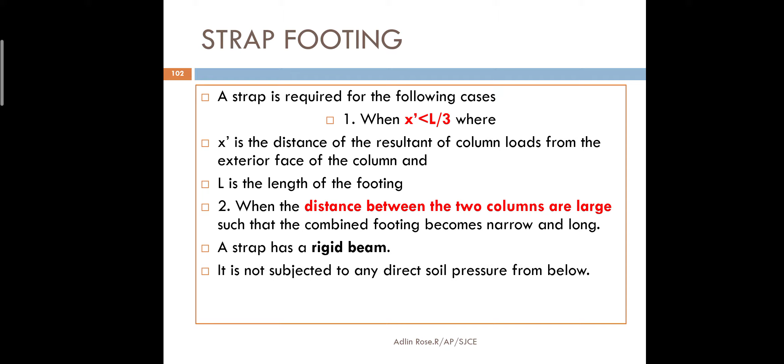We also saw if the distance between two columns is large, they are connected by a strap beam or a strap footing. We know that they will not carry or transfer any load to the soil, but only transfer the moment from the exterior to the interior footing.

There are a few assumptions involved in the strap footing, which we saw in the last class. The assumptions are: we assume the soil contact pressure is going to be uniform below the footings, and the strap footing is a rigid beam. It is considered to be weightless.

One thing I've been telling from the procedure is that there is an exterior footing and an interior footing. Usually the left side footing is the exterior footing and the right side footing is the interior footing.

In strap footing, the interior footing is assumed to have a centrally loaded footing. It's a centrally loaded footing, which means there is no eccentricity. Since the interior footing is centrally loaded and there is no eccentricity, it is going to be a square footing.

Whereas for the exterior footing, the load is not going to act at the center of the footing. There will be some eccentricity between the load and the center of the exterior footing. Due to this eccentricity, we are going to proportion the exterior footing as a rectangular footing.

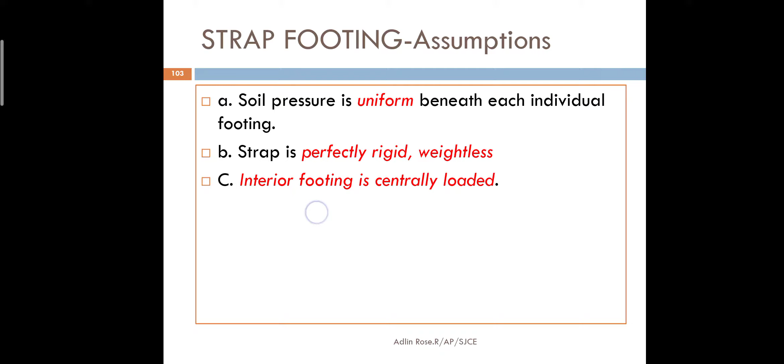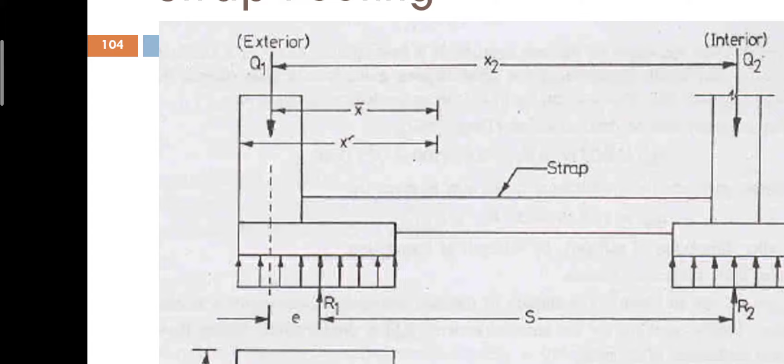So this is what I've been telling: the exterior footing has eccentric loads. There will be eccentricity E between the load Q1 and the reaction or resistance of the soil R1. Then for the interior footing, load Q2 and R2 - since the load is centrally loaded, the reaction will also exactly act at that point.

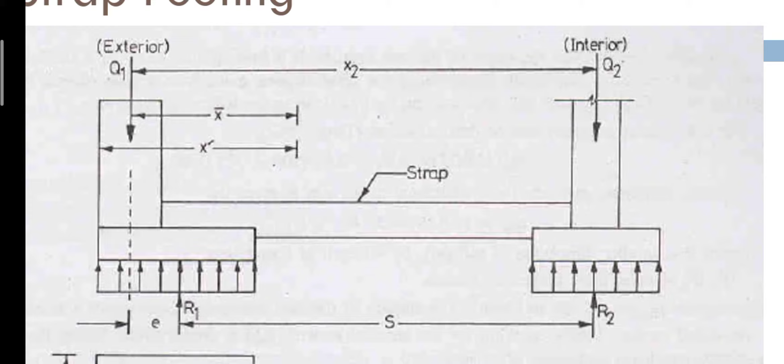The distance between the center to center spacing of the columns is represented by the notation x2, and x bar is nothing but the centroidal distance of the strap to the Q1 load, and x dash is the exterior of the footing to the centroidal point of the strap.

The eccentricity is between the load and the reaction, because exactly at the center reaction will occur, but the load is acting somewhat distance from the center of the footing. So that gap produced is taken as eccentricity E.

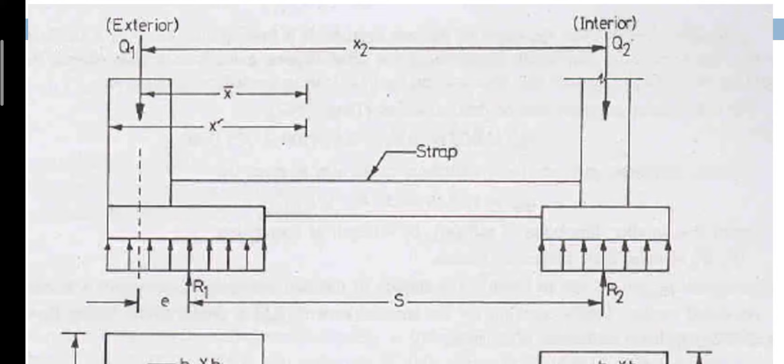From the picture I can tell x2 minus E gives you the remaining distance S. S is nothing but the distance between R1 and R2. So from the picture itself I can tell E plus S is equal to x2. These notations have to be remembered.

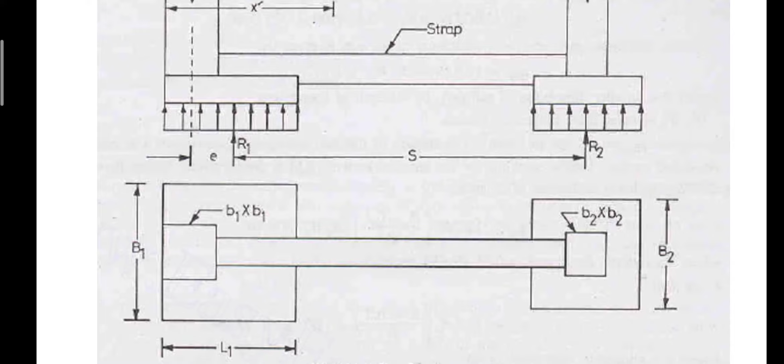Looking at the plan top view, the outer footing is going to be a rectangle, and the size is capital B1 by L1. Size of the interior footing is a square footing, so only one side is enough, that is B2.

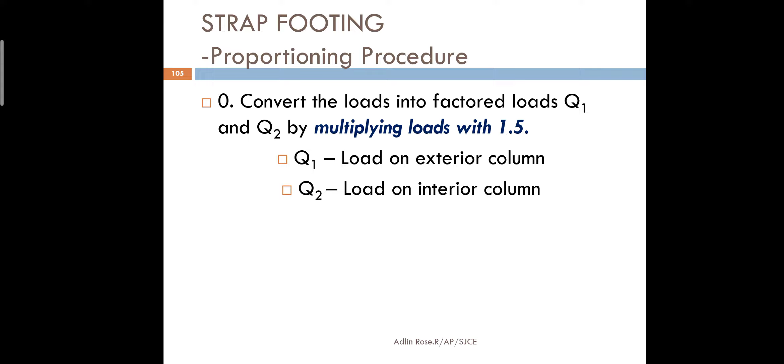Unlike the other two proportioning procedures we saw, first we multiply the loads by 1.5 and convert them into factored loads. Then we will assume an eccentricity. Usually an eccentricity of 0.7 is assumed.

After assuming eccentricity, the length of the exterior footing L1 is found. L1 is equal to 2 into E plus 0.5 into B1, where there is no projection consideration. So note this formula: first factored loads, second step assume an eccentricity of 0.7 meter, then length L1 equals 2 into E plus 0.5 into B1, where B1 is the width of the column, size of the column is b1, and E is eccentricity.

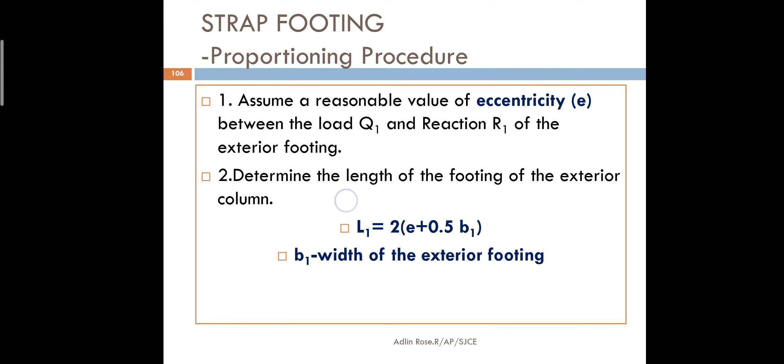The next step is finding the reaction R1. Note down this formula: R1 is equal to Q1 X2 by S.

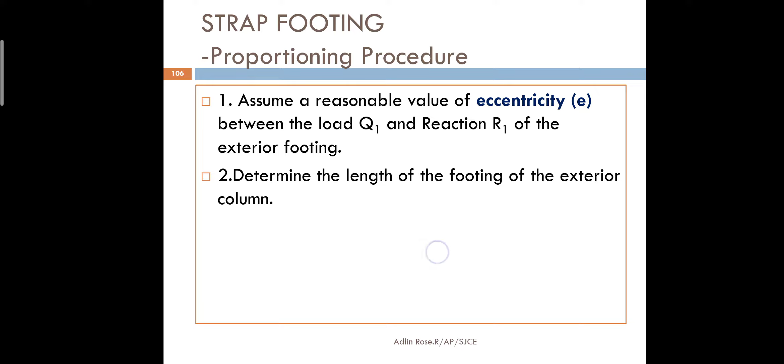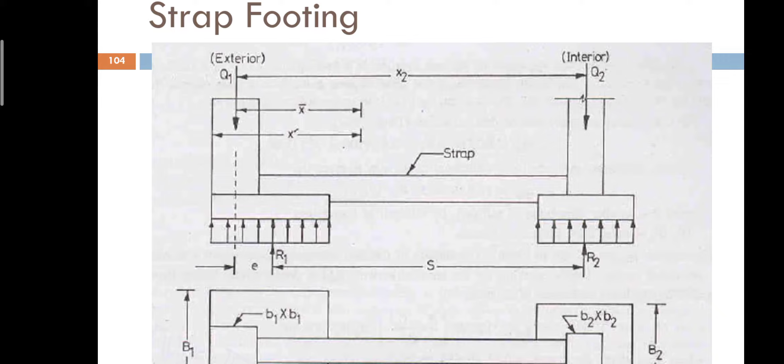How do you get this formula? In the picture, if you take moment about the point where R2 acts, what will you get? Q1 into X2 minus R1 into S is equal to 0. Taking moment at the point where R2 is acting gives R1 into S minus Q1 into X2. So from this we can find R1.

R1 is equal to Q1 into X2 by S, where Q1 is the load acting at the exterior column, and X2 is the center to center spacing of the columns.

And what is capital S? It is the distance between the points R1 and R2.

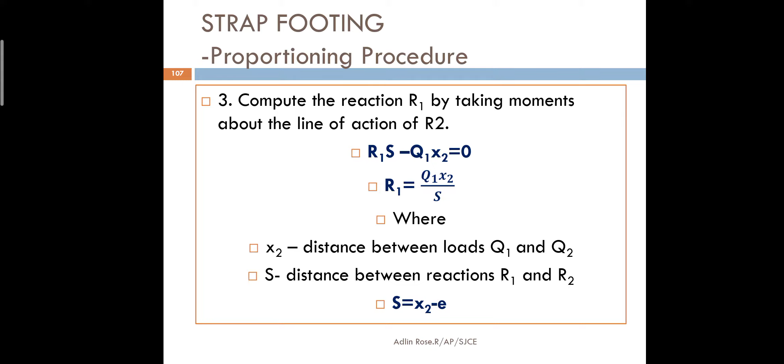And what is S? We can find it from X2 equal to E plus S. So S is equal to X2 minus E. Note down the R1 formula and the S formula: S equals X2 minus E. Then the fourth step.

How will you find the fourth step? After finding one reaction, how will you find the second reaction? By using the equilibrium equation.

Downward forces is equal to upward forces. So downward forces are the loads Q1 plus Q2, and the opposing forces are the reactions R1 plus R2.

Substituting the R1 value found in step 3, we get Q1 into X2 by S plus R2 is equal to Q1 plus Q2. Taking Q1 terms on one side, and R2 and Q2 on the other side, Q1 is taken common on the left hand side, and the LCM is taken: X2 minus S by S equals Q2 minus R2, and we know that X2 minus S is E. So Q1 into E by S is equal to Q2 minus R2. So R2 is equal to Q2 minus Q1 into E by S.

For solving problems, you just have to remember the R2 formula. So note down the R2 formula: Reaction R2 is equal to Q2 minus Q1 into E by S.

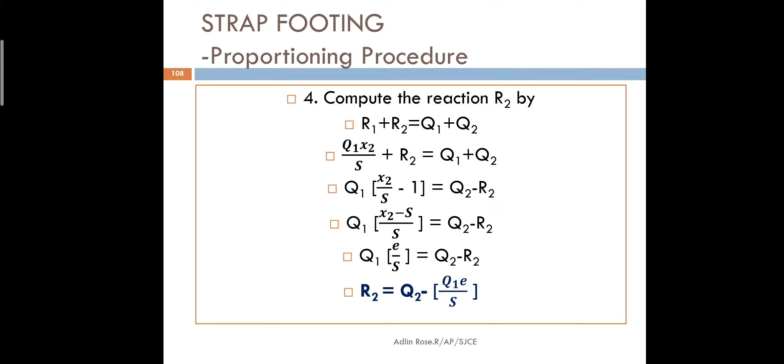Q2 is the load acting on the interior footing. Q1 is the load acting on the exterior footing. E is the eccentricity, and S is the distance between R1 and R2.

Then find the areas. What area did we use there? Load by allowable pressure, load by stress, we used in the trapezoidal combined footing and rectangular combined footing. But in this case we will use the areas differently.

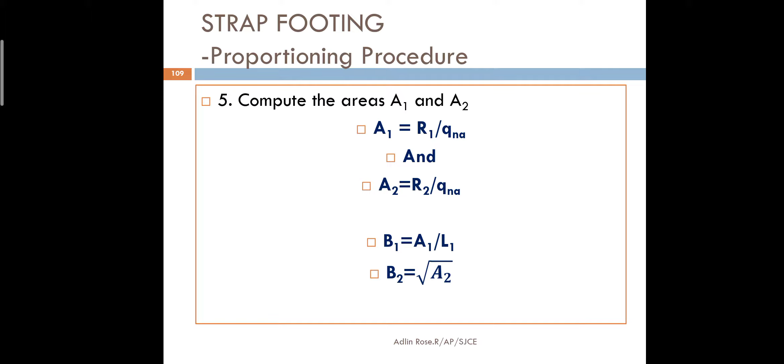A1 is equal to R1 by QNA, and A2 is equal to R2 by QNA. Here we use the reaction instead of load Q1 - you should remember that, you should not get confused. When we find the area here, we will not use the load, we will use the reaction by pressure. So A1 equals R1 by QNA, and A2 is R2 by QNA.

Then find the widths of the strap. I said B1, that is the exterior footing, is going to be a rectangular footing, so B1 is equal to A1 by L1. Whereas the interior footing is going to be a square footing, so B2 is going to be square root of A2.

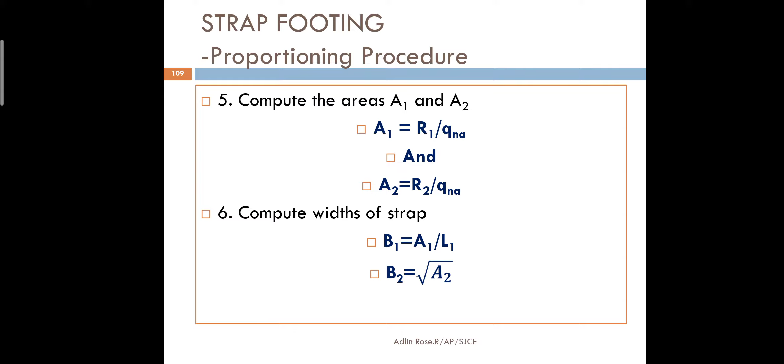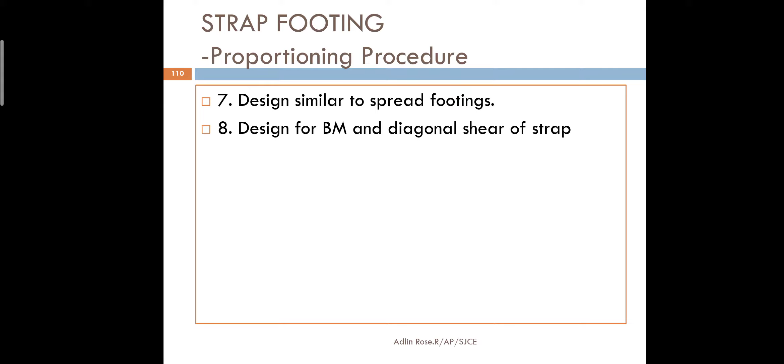Remember that. After finding these, then find the bending moment, find the shear force, draw the bending moment diagram, draw the shear force diagram, then find the reinforcement detailing. That is about the proportioning procedure.

Now we will move to the problems.

It is decided to provide a strap footing for two columns A and B as detailed below. Column loads: load at A is equal to 1500 kN and load on B is equal to 1450 kN. Size of the column is 0.5 meter. Center to center spacing of the columns is 5.8 meter. Allowable soil pressure is equal to 370 kilonewton per meter square.

So first we'll write the given data. It is asked to proportion a strap footing. Second, column size is given, so column size B1 is equal to 0.5 meter. Then load on the exterior column A, that is 1500 kilonewton. Load on the interior column B is equal to 1450 kilonewton. Center to center spacing of the columns, represented by X2, is equal to 5.8 meter. Allowable bearing capacity or allowable soil pressure QNA is equal to 370 kilonewton per meter square.

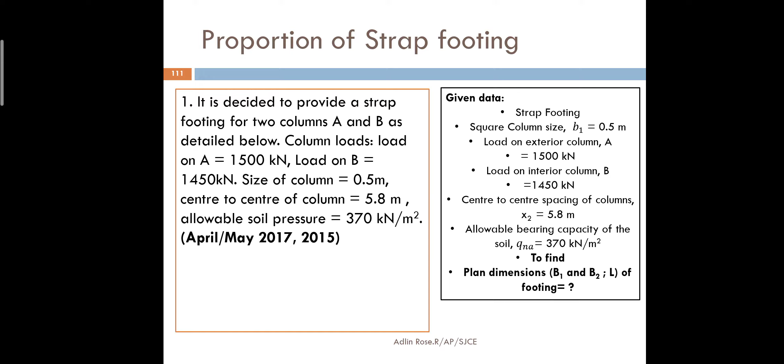Now, what is to be found are the plan dimensions. They have asked to find the plan dimensions. Now we'll go by the steps.

First we should multiply the given loads by 1.5. So multiply load A by 1.5: 1.5 into 1500 equal to 2250 kilonewton. Then load at the interior column Q2 is equal to 1.5 times B: multiply 1.5 by load acting at the interior column, 1450, equal to 2175 kilonewton. So first we will multiply the given loads by 1.5.

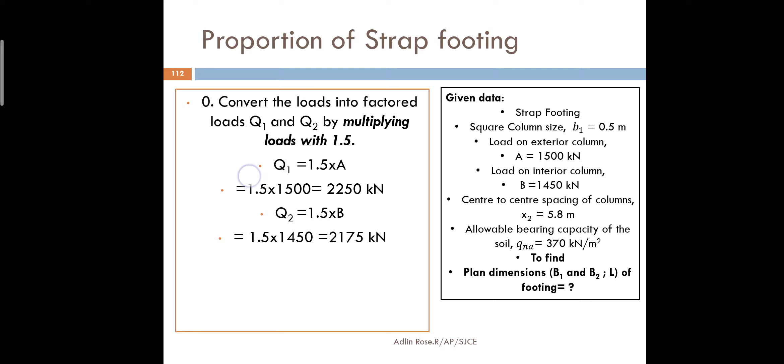What is the second step in strap footing? We assume an eccentricity. I told you to assume an eccentricity of 0.7. Reasonable eccentricity, assume it to be 0.7. In almost all cases you assume it to be 0.7.

How will you find the length? We know the length formula: L1 is equal to 2 into E plus B1 by 2, or L equals 2 into E plus 0.5 B1. So 2 into E, assumed to be 0.7, plus 0.5 into B1 - in the question the size of the column is given as 0.5.

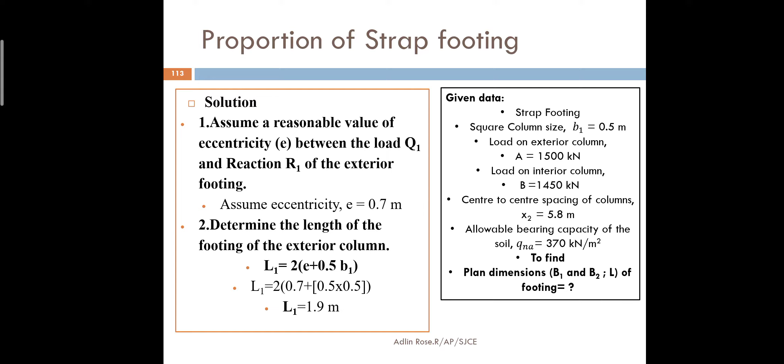So you'll get L1 equal to 1.9 meter. After finding L1, what is to be found next? The next step, we have to find R1, R2.

To find R1, R2, first we should find R1. What is the R1 formula? Q1 into X2 by S. And we have an S formula. What's the formula for S? X2 minus E.

X2 is nothing but center to center spacing 5.8 meter minus we assumed an eccentricity 0.7, that will give you 5.1 meter. Substitute in R1. Q1 is 2250 into 5.8 center to center spacing divided by S 5.1, that will give you 2558 kilonewton.

After finding reaction R1, we can find reaction R2. R2 is equal to... again the same is repeating. Now you have to find R2. How will you find R2? We have a formula: R2 is equal to Q2 minus Q1E by S.

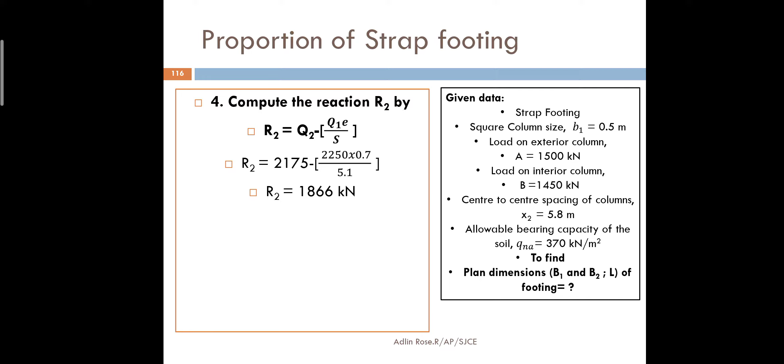So what is Q2? 2175, found in the first step. Minus Q1 is also 2250, which we found out earlier. Into eccentricity we assume to be 0.7, divided by S which is 5.1. That will give you 1866 kilonewton. Next step is finding the area.

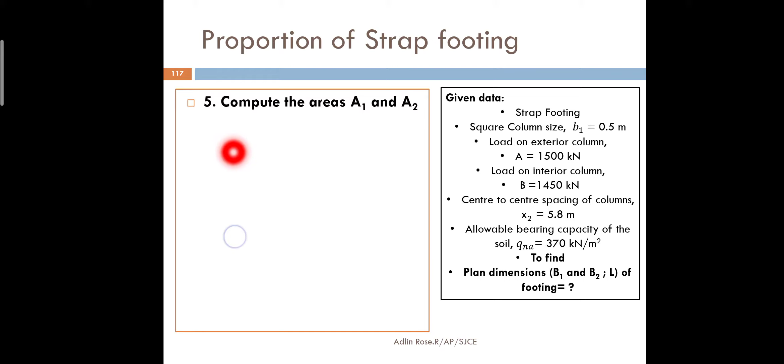How to find the area? A1, A2. As I said, area is equal to... we know that stress is equal to load by area, so area is equal to load by stress. Here instead of using load we should use reaction.

That you should keep in mind. In strap footing we use reaction. So area A1 is equal to reaction R1 by the pressure or the stress given, which is QNA. That is R1 equal to 2558, which we just found, divided by QNA which is 370 given in the question.

That will give you 6.9 meter square. Similarly, A2 is equal to R2 divided by QNA. So R2 is 1866 divided by 370. That will give you...

5.04 meter square. Now after finding A1, A2 we should find B1, B2. So B1, what is B1? B1 is rectangular footing, so A1 divided by L1 gives me B1.

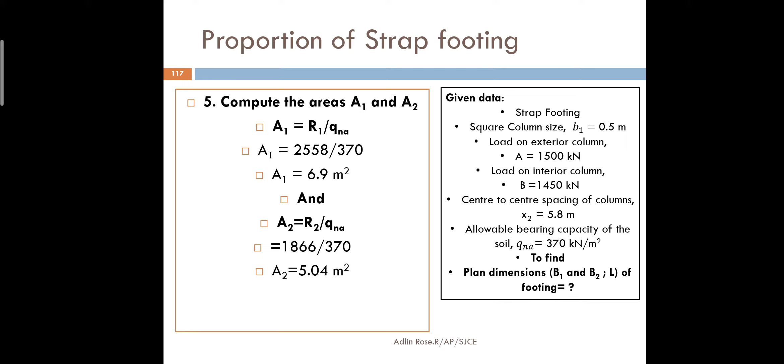B2 is a square footing, so taking the square root of A2 gives me B2. So compute the width of the strap.

So B1 is equal to A1 by L1, which is A1 which is 3.63, round it off to 3.65 meter. Also B2 is square root of A2, that will give you square root of 5.04, that will give you 2.24, round it off to 2.25 meter.

There's no checking needed here, we just have to find these values. So it is very simple only. When you memorize the steps or the procedure, it will become very easy.

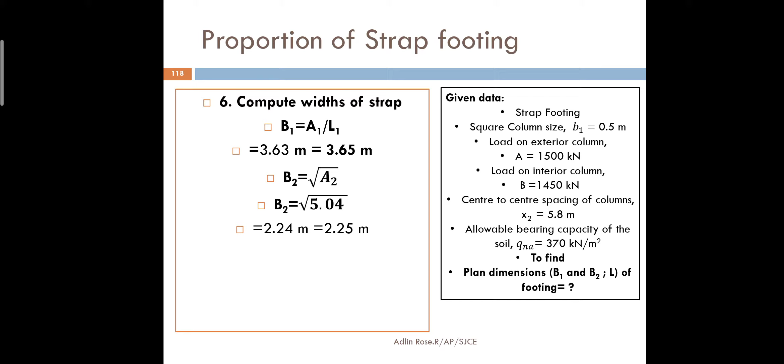Okay, we are moving to the second type of problem: live load dead load problem. Before this, we solved the same problem with dead load for rectangular combined footing and trapezoidal combined footing. Now we are going to solve the strap footing.

Whenever dead load live load comes, what is the technique? Steps: initially we arrive at the dimensions using the load combination dead load plus reduced live load. For the smaller loads, dead load plus reduced live load is smaller than dead load plus live load combination. So we arrive at the dimensions for dead load plus reduced live load combination, and then we check whether it can carry the higher load combination dead load plus live load.

So first we should use the dead load plus reduced live load combination. Also, when finding total loads, we use the number 1 for dead load plus live load combination, and number 2 for dead load plus reduced live load combination.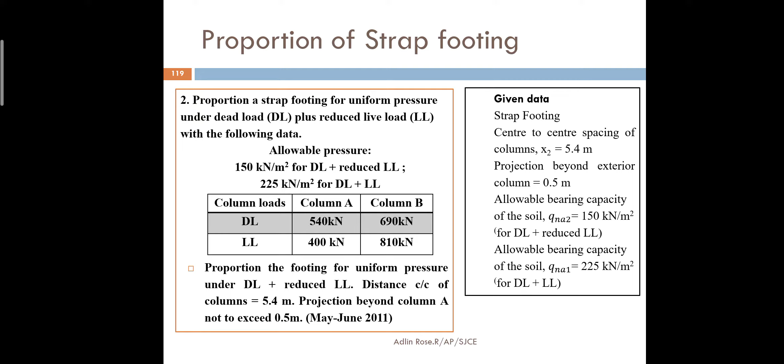Then column B. Column B's dead load is 690 kilonewton. Column B's live load is 810 kilonewton. So what is dead load plus live load in column B? 690 plus 810, that is equal to 1500 kilonewton.

Here we don't have total load, so we don't add A1 plus B1. Why? That is not needed here, because two separate footings are connected by a strap. There is no link between this load and that load, so we don't have the total load acting at the center of the beam, at the center of the strap. So we don't need the total load at all.

Then dead load plus reduced live load. What should you do with the reduced live load? Reduce the live load to 50%, that is multiply the live load by 0.5. So A2 is equal to 540 plus 400 multiplied by 0.5, that is equal to 740.

Also B2 is equal to 690 plus live load multiplied by 0.5. So 0.5 into 810, when you add these two we get 1095. Here we don't need the total loads, that's not required in the strap. So we just need A1, B1, A2, B2.

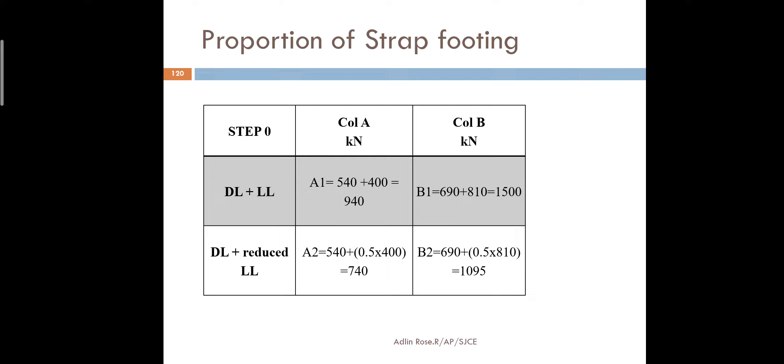In dead load plus live load combination, the load acting on the exterior column is 940, and the load acting on the interior column is 1500 kilonewton. In dead load plus reduced live load combination, the exterior footing load is 740 and the interior footing load is 1095. So first we always solve for the smaller loads.

That is, we use the data of dead load plus reduced live load. So we assume an eccentricity of 0.7. Here we don't have the first step of multiplying the given loads by 1.5, because here it is dead load plus live load, not total loads. So we don't multiply the loads. We just find the dead load plus live load and dead load plus reduced live load combinations and start from the second step.

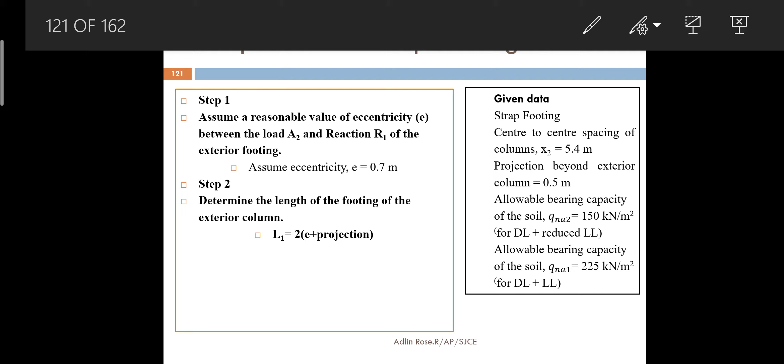Find the eccentricity. Assume an eccentricity of 0.7. So we find the length of the exterior footing, L1 is equal to 2 into E plus 0.5, into B1 or if B1 is not given, we just add E plus projection. Keep this in mind: 2 into E plus projection. So 2 into E, which is 0.7, plus projection, which is 0.5. So you get 2.4 meters, approximately rounded off to 2.5 meters.

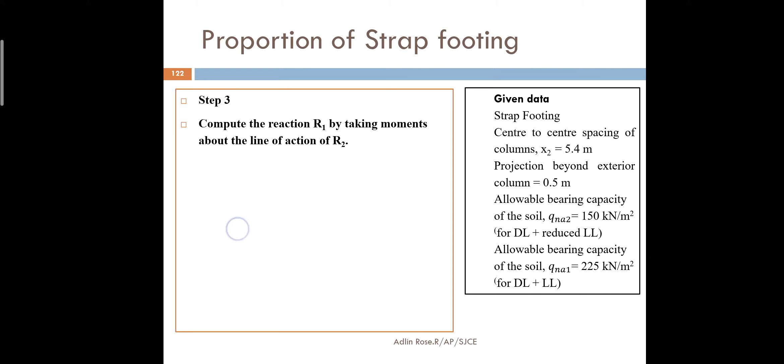Projection is given, so okay. Then reactions, what is the reaction formula? R1 is equal to, as we studied the formula, Q1 into X2 by S. Here instead of Q1 we use the term A1.

Dead load plus reduced live load, sorry, so A2 — what is A2? The load acting on the exterior footing, reduced, since we are solving the reduced live load case. So exterior footing load is A2, interior footing load is B2. So in exterior footing load, A2 into X2 by S. Also S is equal to X2 minus E. So X2 is 5.4 minus E which is 0.7, that gives you 4.7 meter. So R1 is equal to 740 into 5.4 divided by 4.7, that gives you 850.21 kilonewton.

After finding R1 we find R2. So R2 is equal to, as we put in the formula, Q2 minus... here instead of Q1 Q2 we have A2 B2. So B2 minus A2, into E by S. So B2 is 1095 minus A2 is 740, into 0.7 by 5.4. This will give you 999 kilonewton. After finding R2 we find A1, A2.

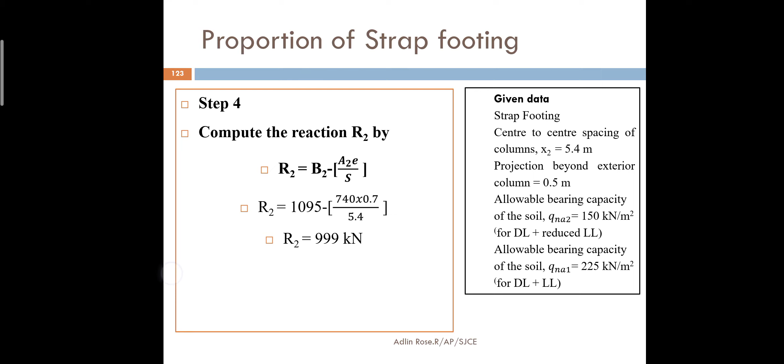When checking, we use the letters capital A, capital A1, capital A2. Since capital A1 is already used here for loads as A1, A2 and B1, B2, I am using small a1 as area here. So areas are small a1 and a2.

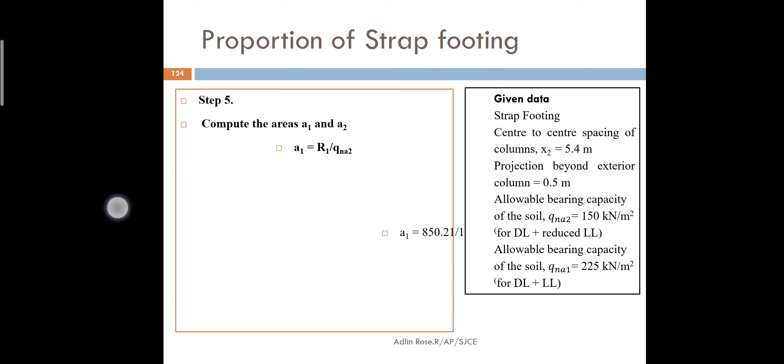Area small a1 is equal to R1 divided by QNA2, and R1 is 850.21 divided by 150, which is 5.66 meter square. And we find A2 equals R2 divided by QNA2. Why do we put 2 here? Everything uses 2 - QNA2 and load also A2, B2 - because first we proportion for dead load plus reduced live load combination. R2 is equal to 999 divided by 150, which gives 6.66 meter square.

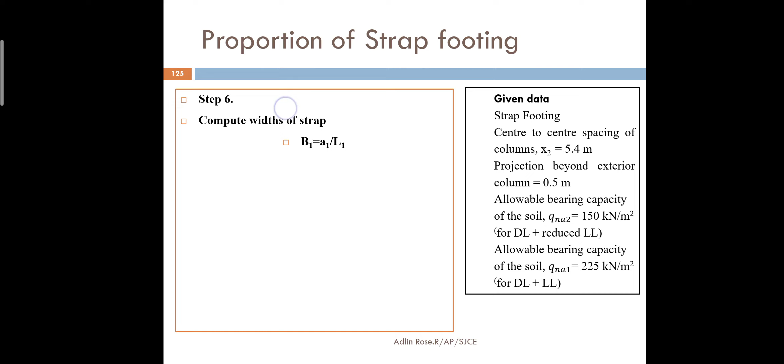After finding the area we find the dimensions of the strap, width of the strap. Use small b1 if it confuses you with capital B1. So small b1 is equal to a1 by l1, which gives 2.26 meter, rounded to 2.3 meter. Using 2.3 by L1, we first found and used 2.5 meter. So it's a rectangular footing for the outer footing, and the interior footing is square.

Since we have rounded off the values, we have a corrected area. The corrected area CA1 is equal to 2.3 into 2.5, which gives 5.75 meter square. Since we have to check whether the found dimensions are correct, we should find the corrected area by multiplying the rounded off values of width and length: 2.3 into 2.5 meter, giving 5.75 meter square.

And b2 is equal to square root of a2, since it's a square interior footing, and b2 is equal to 2.58, which I am rounding off to 2.6 meter. Since it's a square footing, the dimension is written as 2.6 by 2.6 meter. So corrected area is equal to 2.6 into 2.6, which is 6.76 meter square.

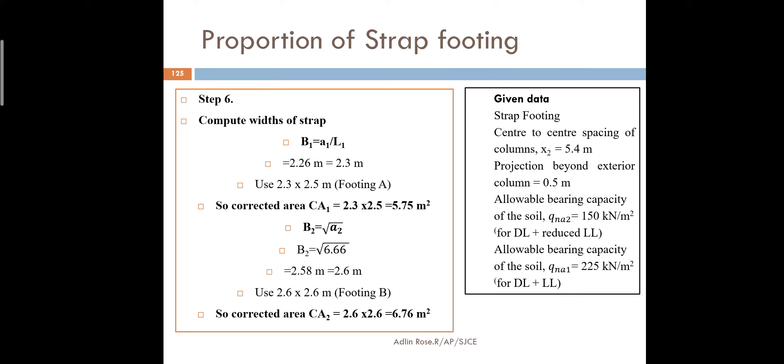Now we have to check whether it can carry heavy loads. How will you find heavy loads? From step 7 onwards we use dead load plus live loads. R1 is equal to A1 x2 by S.

A1 here, the load 940 into x2 which is 5.4, divided by S which is 4.7, gives 1080 kilonewton. Now find the reaction R2.

R2 is B1 minus A1E by S. B1 is the load in the interior footing, so 1500 minus A1, which is the load in the exterior footing, 940 into eccentricity 0.7 divided by 5.4, gives 1378 kilonewton. After finding R1, R2, we find the check.

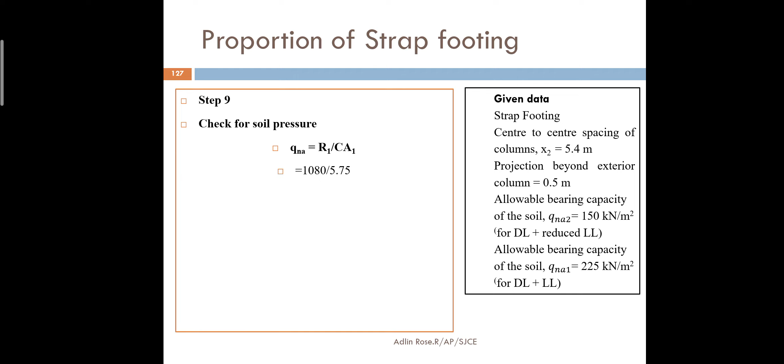How to check? We find the check using this formula: pressure equals QNA equals R1 by corrected area 1. Here the QNA we found, using the loads in the dead load plus live load combination, and the R1, R2 we calculated, we should find the check.

So QNA is equal to R1 divided by CA1. We should use this R1 - what is the difference with this R1? This R1 comes under dead load plus live load, so we use this R1.

So we put 1080 divided by 5.75, which gives 187.8 kilonewton per meter square, and it is less than the given pressure of 225 kilonewton per meter square. Similarly, check QNA for the second footing equals R2 by CA2, which is 1378.1 divided by 6.76, giving 203.8, also less than 225 kilonewton per meter square.

Hence it is okay, hence your assumptions are okay. So remember not to be confused by this R1 and R2 - finally in the check we don't use the earlier R1, R2, we use this R1 and R2, the ones obtained using the dead load plus live load combination.

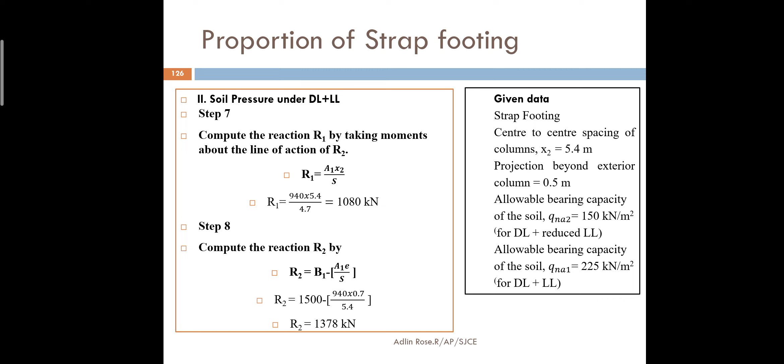Until step 6, all the data we used was for dead load plus reduced live load. After step 6, from step 7 onwards, we use the data for the dead load plus live load combination. So when you solve this, use this template, and when you solve the problems you can understand. Okay, I will.